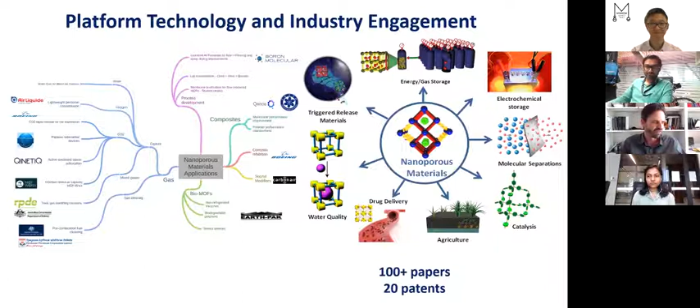One of the things that was most interesting to us was, given that we got so good at capturing carbon dioxide at that 3, 4, 5, 10%, is it feasible to do it directly from the air? Now, of course, we all know that the amount of carbon dioxide in the air keeps going up and up. It's a bit over 400 parts per million right now, but that equates to about 0.04%.

Some people might say, well, that's such a small number, why do you even care? Well, 0.05% of alcohol in my blood means I can't drive a car. So we know that very small amounts of molecules have very, very big effects. And that's what we're seeing with carbon dioxide. There's 400 parts per million. It's a significant thing. We need to do something about it.

But of course, it's also a challenge from a separation science standpoint that only one in every 2,500 molecules that are in the air is a carbon dioxide molecule. And so we need to efficiently find that molecule, capture it, and then release it from whatever we've captured it in so that we can give it to Akshat.

So some of the applications that you could use CO2 for and are already used are on this slide, as you can see here. And believe it or not, Australia is a net importer of carbon dioxide. So at the same time as us making so much carbon dioxide, we still buy it in on a boat, somewhere between $300 and $800 per tonne. So those are the numbers you want to remember. $300 to $800 per tonne is what the current market price is for carbon dioxide.

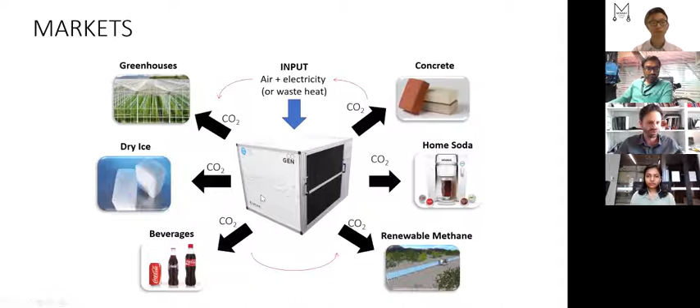So what we did, joint with the CSIRO, we started about 4 years ago, which was to look at can we find a business case for doing this? And this is where we started to understand what the prices needed to be per tonne of carbon dioxide captured. And that set us a technology challenge of whether we could get a material that's below that.

So what I'm going to show you now is what we know at this point in time about the cost of doing this. And so a couple of years ago, we got a grant to then build a prototype demonstrator, which is TRL6, which is a large-scale unit so that we could actually prove some of this technology. I'll just show a couple of the results to introduce it all.

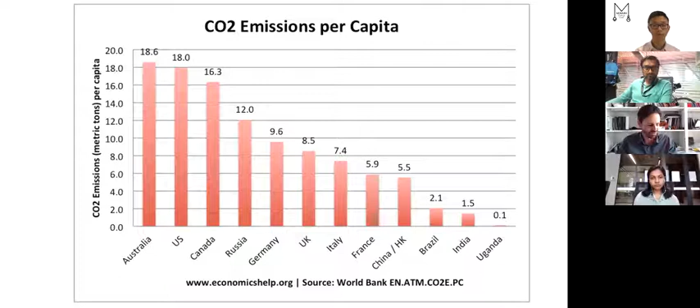So, of course, here's that other slide. Australia, we import CO2, but we're also one of the highest emitters per capita of CO2. So if ever there was a country that needed to work on this, it's us.

And so when it comes to that economic feasibility, we worked out that there was one number that was most important, and that is how strongly does whatever method you use to capture the CO2 bind with your CO2 molecule that you're capturing? The more strongly it binds, that's more energy you have to put in to release that CO2 molecule so you can regenerate your system.

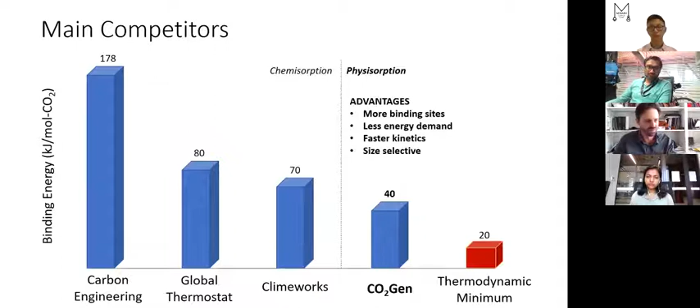And so you just think of this as money. So the higher that these are, the bigger the money. Now, these are other competitor companies that are present on the market at the moment. And the thing about our technology that was exciting was that it's a much lower binding energy. So from a feasibility perspective, that's exciting, but we're still trying to get that 1 in 2,500 molecules out. So we need to do a few other tricks because we're not grabbing onto it as strongly as we might otherwise be able to.

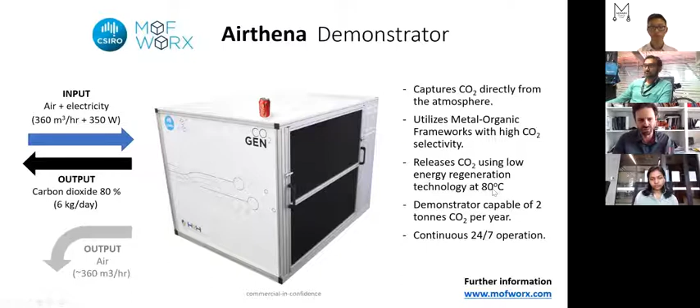So here's our unit. We called this unit Airthena - Athena being the Greek god of science, and we're dealing with air, so that's how we came up with that name together. The TRL6 prototype that I mentioned. And essentially what we did was to build a very, very special MOF nanocomposite and put it inside here in a series of adsorption columns and cycle it again and again. And you can see here, we just need to get to about 80 degrees to release that captured CO2.

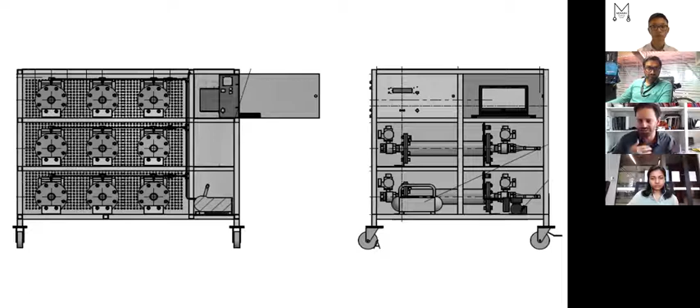So this is a plan of what's inside at the moment. This is in the New Horizons building here on campus. We have 9 adsorption columns filled up with MOF nanocomposite. It takes about 40 minutes to saturate one of the canisters - you've got to blow a lot of air through because there's not very much CO2 in the air. And it takes about 20 minutes to regenerate, so to heat up to 80 degrees, release the CO2 that you've captured, and then cool it back down, ready to go again. So at any one moment, we have 6 of the tubes filling and 3 of the tubes empty for that reason, because of that 2-to-1 ratio.

So we ran this for a while. Initially, we ran with one tube, and I sat there for the whole day with a Microsoft Excel spreadsheet and wrote down every number. Then 3 months later, we had it automated, and we did 1,100 cycles in a week. But it just took us a bit of time to get that right.

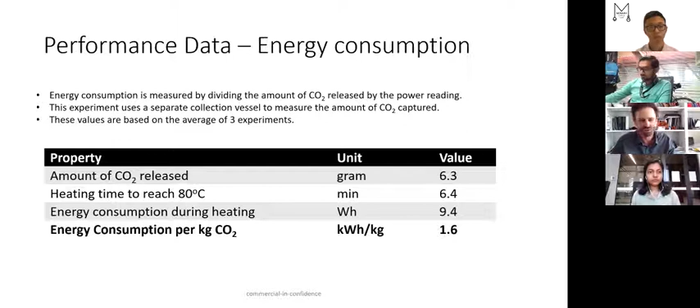And from that, we were able to start to pull out some of the data. It's just a very quick talk today, so I'm showing you a couple of quick data points. Here's one of the key ones: energy consumption per kilogram of CO2. That's the number we need to know because that's the operating cost of running that. We need about 1.6 kilowatt hours for every kilogram of CO2 that we get our hands on.

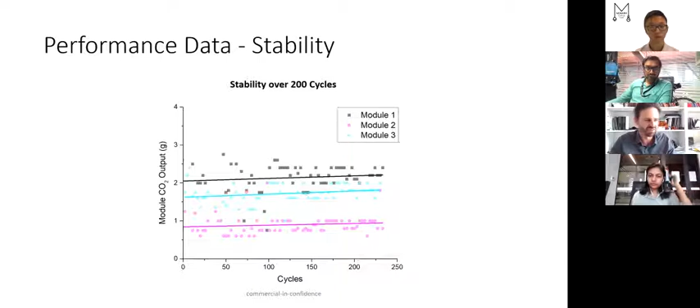You can see the unit's very stable. Here's 200 cycles, 3 different modules, different packing, so they had different amounts of CO2. But you can see the best fits there that over several hundred fills it's essentially unchanged in its performance.

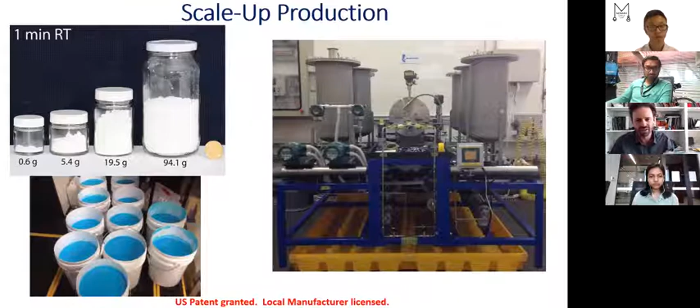We then produced the materials, and I'm showing you here a photo of the large-scale chemical manufacture. This is now happening just down the road in Noble Park at a company called Boron Molecular, and they're making about 100 kilograms per week of the material and getting that cost significantly down as well.

Based on all of that, we were able to put together a bit of a summary. So that 1.6 kilowatt hours per kilogram - it depends on what your energy costs, of course, if you get it from solar panels or waste heat, or you buy it from a coal-fired electricity station, all different options. And that gives you a number somewhere between 45 and 200 US dollars per tonne for your operating costs.

Remember I said that the price that we pay off a boat today is between $300 and $800 per tonne. So it's between 40 and about 200 operating.

So you have to add that on to the operating. We're somewhere between $220 per tonne and maybe about $400 or $500 per tonne total cost for doing CO2 capture directly from the air. So we're at that point.

You might say, well, okay, it might be cheaper, it might not be cheaper than buying it off a boat. The bigger question, of course, is that's the cost - what's the price, though, to the world of having less CO2 in the air? And so we're at the sort of tipping point of the feasibility. As we scale it and scale it and scale it, maybe we can bring these numbers down even further.

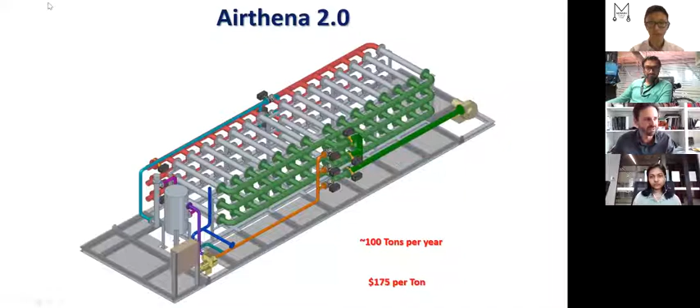So Matt, what kind of drew you to using MOFs for CO2 capture? Like what kind of attracted you to the potential of this technology for this purpose?

Well, I guess it's that fundamental thing of the low energy requirement. The reason that all of those other examples are so much higher is they're doing a chemical reaction - they're actually forming a new molecule that has CO2 inside of it, and that requires a much higher amount of energy. We thought with MOFs, that weaker interaction would give us a chance of making it more feasible. We sort of backed ourselves that with MOFs, with these very small holes, we could use all the other tricks of the trade to make the CO2 selective without having to use a lot of energy to do so.

Yeah, awesome. I'll just fill out another question. So we've got one from Nimrod: how do you scale it up to capture CO2 from alumina refining or iron and steel?

For alumina refining, iron or steel, it's a different challenge. In those situations we have a point source of emission, so there's a whole bunch of CO2 being emitted out of one pipe at a much higher concentration. We can use a different type of system because going from 0.04% to say 10% is several orders of magnitude different in gas composition. What we know today is the best way to capture CO2 at those levels is to use a membrane, which is like a filtration technology for those much higher scales. That's another area of research we're very interested in.

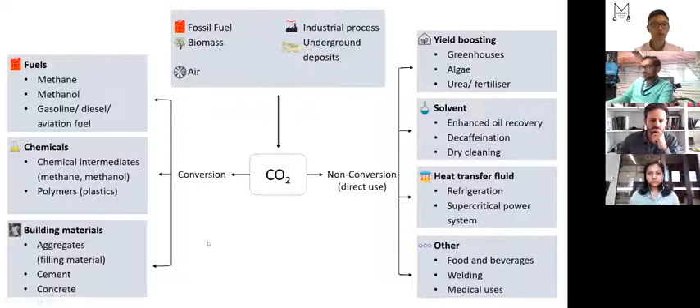Mineral carbonation is where you get construction materials. Chemical conversion is where you're doing catalytic reactions of some sort to convert it into intermediates, chemicals and fuels, which is where my group is mainly focused.

So we've developed a couple of new processes for converting CO2 directly into formaldehyde, which currently comes from methanol, and that methanol comes from natural gas. If we can bypass all of that process and make formaldehyde directly from carbon dioxide, then formaldehyde is used in many chemical industries. Mostly it is used as a resin in particle chip boards. It's used in making polyurethanes and other foams and plastics. So they are actually used in making stuff that is solid, and can stay in solid form for a little bit longer than a few days.

Then there are biological conversion pathways. So instead of using a catalyst, you use microbes, either enzymes or whole organisms, to convert CO2 into some intermediate chemicals or polymers, even polymer precursors.

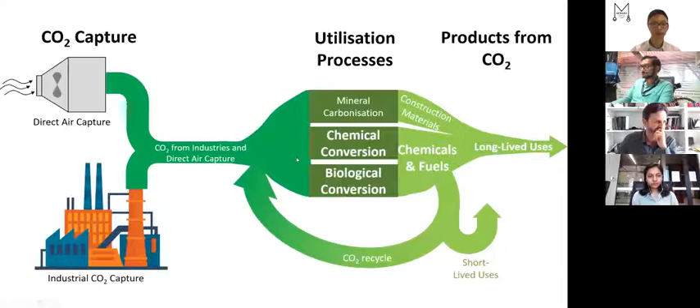Akshat, traditionally, a lot of the chemical pathways for CO2 conversion rely on a lot of energy and heat, which we typically derive from fossil fuels. How is this particular research area overcoming that challenge so that we can integrate more renewable energy into the process? Yeah, so renewables integration is the main challenge, and electrification of chemical industries is what is needed.

Traditionally, when we teach chemical engineering today, we say heat is much better than electricity in terms of heat transfer. So wherever we want to achieve heat transfer, we use a heating or cooling fluid rather than electric power, because traditionally that electricity comes from burning coal, and there are inefficiencies in that power generation. It's only about 30% efficient, unless you go for supercritical, which then starts to approach about 40% efficiency, and then there are transmission losses and whatnot. So in the end, the energy usage we get is a factor of 3 less than what the primary source of energy was. If you take, for example, 300 kilojoules of energy from a primary source like coal, only about 100 kilojoules is eventually transferred to the process, which is not what you want.

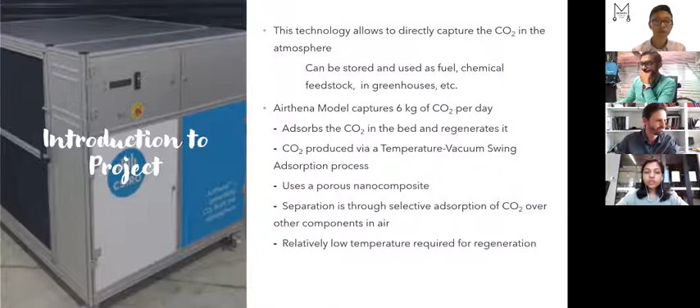We only need a relatively low temperature to regenerate the CO2 back out, and hence the cost of energy used for this small scale model is not too high, which is good news for us.

My project objective is to focus on upscaling this current process that produces 6 kilos of CO2 per day to possibly 10 tons of CO2 per day, or even more. We're currently looking at maybe expanding it, but for now the focus is to see if the 10 tons CO2 per day model is feasible, and how we should change it.

I'll also be looking at observing factors affecting the yield of CO2. There have been a few challenges met along the way. My whole point in this project is to come up with feasibility studies, model it on software to see how we can change it, how we can better it, etc.

The overall objective is to increase the percentage of CO2 in a greenhouse to promote plant growth, and as Akshat said, this would only require a smaller percentage of CO2. So even if we want to go higher than that, there should be an upscaling process to look into.

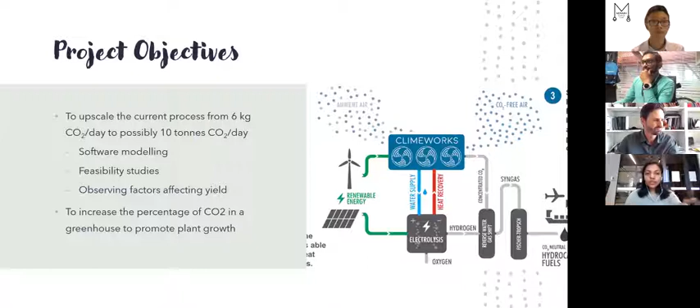In terms of the technical work I've done since starting this project last summer, I've been using a few softwares, and I've attached some screenshots here. The basic purpose was to check general mass and energy balances, to see first if we can model the small scale model on software correctly.

Then I looked at how we can upscale that small scale model on the software. For this, I've had to curve fit certain data in terms of the adsorption isotherms to fit it into the models in these softwares. Those are some of the graphs you can see there.

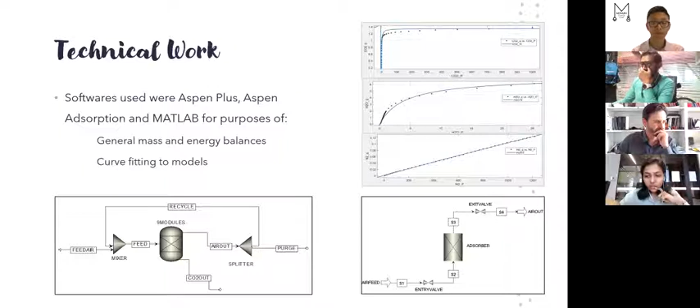At present, the project's progress has been looking at modeling the process flow diagram for upscaling. Matt showed you the small scale existing model with 9 beds in one row. For the upscale model, if we were to build it, we'd have to make the beds bigger and have only 4 of them.

So 2 of them would be adsorbing at the same time, while the other 2 would be desorbing, as a whole cycle. For this process flow diagram, we've calculated a rough cost estimate, which is the cost Matt mentioned earlier. We also looked at maybe branching out to capturing other components, but for now the main focus is carbon dioxide.

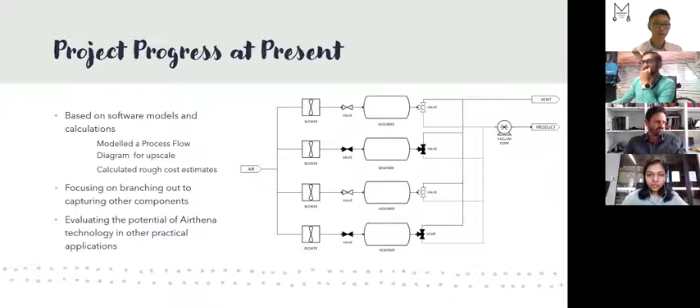We've also evaluated the potential of Airthena technology in other practical applications. That's the whole point of Akshat's presentation, talking about how CO2 capture can be used anywhere. These fans, these blowers, are the large industrial fans used by a company called Climeworks. They use a different process to ours, but their end goal is to capture CO2 by directly blowing it through the air. So those bigger fans would be the size we'd have to go for, just to give you an idea of how big this would be.

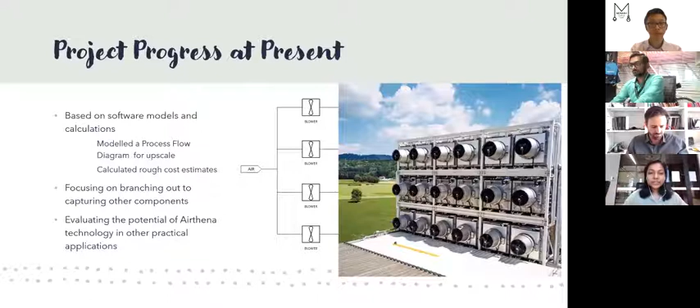Akshat looks at negative emission technology, with the aim of reducing global warming to at least 1.5 degrees above pre-industrial levels. If this project were upscaled properly, it would reduce it to at least 2 degrees above industrial levels, which, as the United Nations decided, would be way below the goal they set. So this is a very important project in terms of enhancing quality of life, and we also look at carbon emissions trading.

In terms of how I use my skills and knowledge as a student to be part of this project, these are a few of the softwares I've had to use. At Monash, they don't teach all of these, so there was one called Aspen Adsorption that I had to learn, which was fine because I reached out to my supervisors for guidance. I'd also like to state that the design units we have for chemical engineering have been extremely useful for understanding how to do a basic cost estimate, a rough process flow diagram design, and skills like that. Thank you for listening.